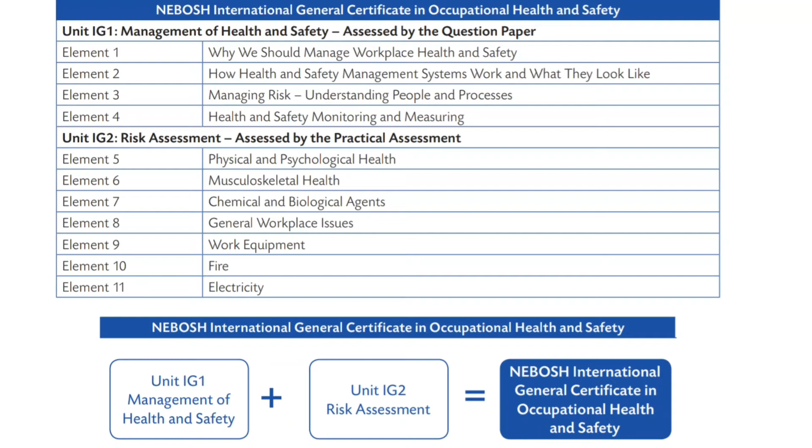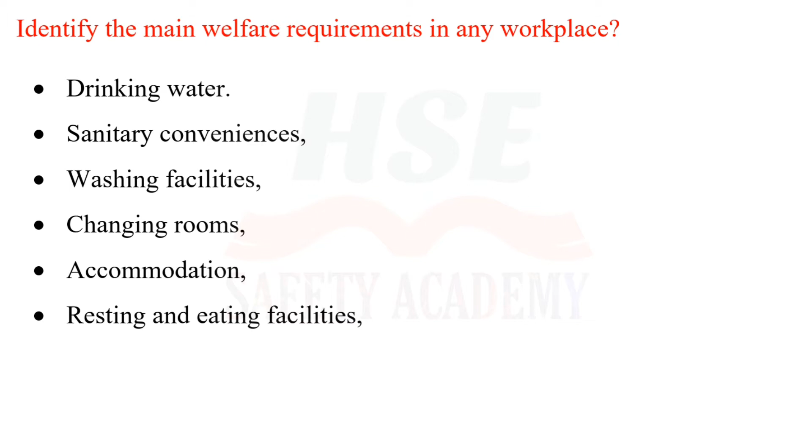NEBOSH International General Certificate in Occupational Health and Safety Unit IG2 Element 8, General Workplace Issues. Identify the main welfare requirements in any workplace. Drinking water. Sanitary conveniences. Washing facilities. Changing rooms. Accommodation. Resting and eating facilities.

Identify the protective measures to be used for working in conditions of extreme heat. Providing good workplace ventilation such as air conditioning or fans to circulate air which has a cooling effect. Insulating heat sources by lagging hot pipes. Shielding heat sources to control radiant heat and prevent contact burns. Providing cool refuges where workers can escape the heat.

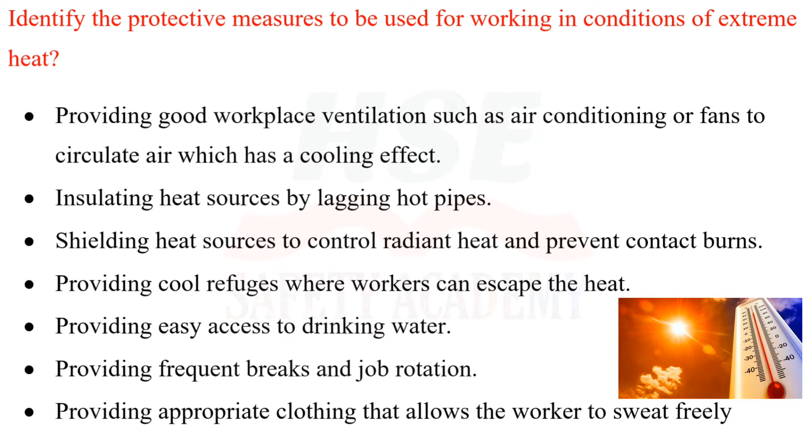Providing easy access to drinking water. Providing frequent breaks and job rotation. Providing appropriate clothing that allows the worker to sweat freely. What are the health and safety effects of working in a hot environment? Dehydration. Muscle cramps. Heat stress.

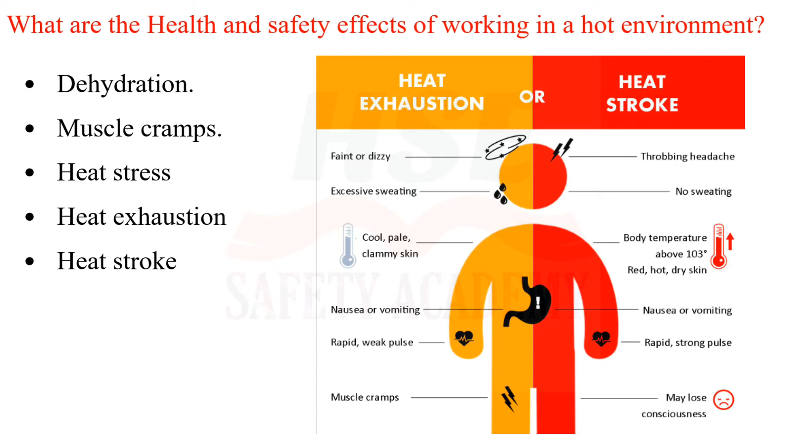Heat exhaustion. Heat stroke. What are the main risks using ladders? Workers falling from a height. Falling off the ladder. Ladder toppling sideways. Ladder base slipping out from the wall. Objects falling from height. Contact with live overheads.

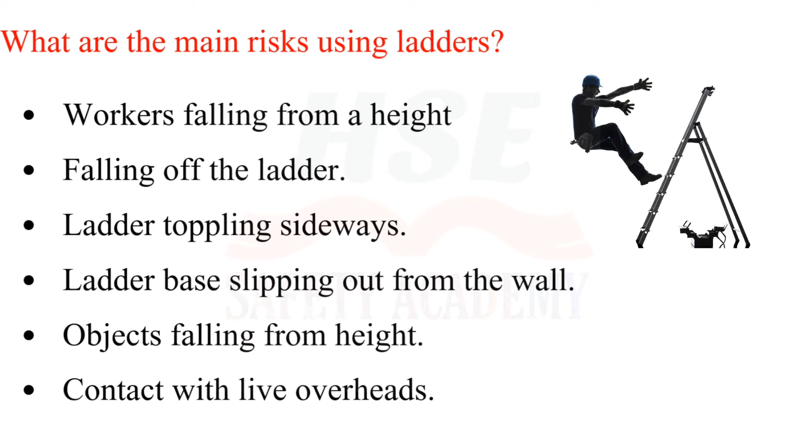Explain the safety precautions for using ladders. Not siting or handling near live overheads. Siting on a solid, flat base so that the feet do not sink into the ground. Weight should only be supported on the stiles, never on the rungs. Angling the ladder ideally at 75 degrees to the horizontal or at a ratio of 1:4, 1 out to 4 up, distance away from the wall to height.

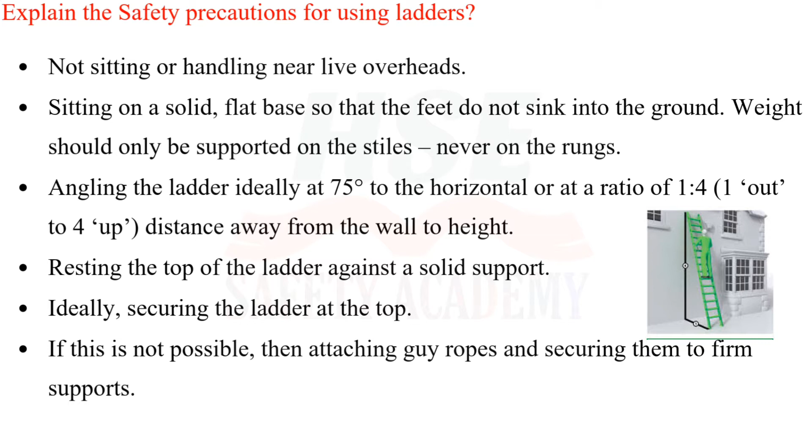Resting the top of the ladder against a solid support. Ideally, securing the ladder at the top. If this is not possible, then attaching guy ropes and securing them to firm supports. If this is not possible, ensuring that the ladder is footed by someone standing on the bottom rung.

Extending the top of the ladder far enough above the level of the working position or the platform onto which it provides access to provide a safe handhold. This should be at least 1 meter or 5 rungs if used as a means of access. The stepping off point should be safe and clear. Making sure that only one person climbs on the ladder at any one time.

Not carrying anything in the hands while climbing, so that both hands are free to grasp the stiles. Maintaining 3 points of contact while working. Not painting wooden ladders as this can hide defects such as rot.

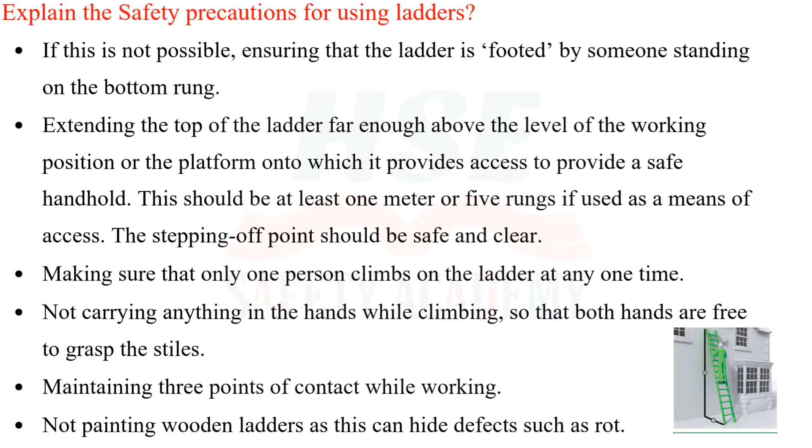What are the safety precautions for the use of stepladders? Carry out a daily check of the stepladder before use. Always ensure that the ladder is fully open. Make sure that the locking devices are in place. Only use on firm, level ground which is not slippery.

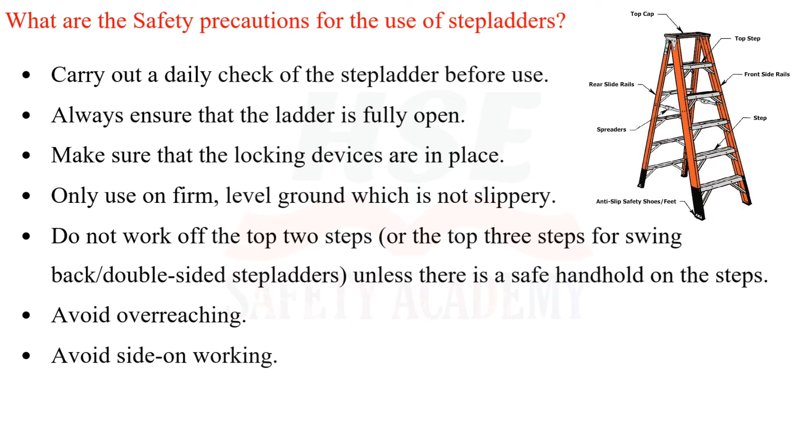Do not work off the top 2 steps, or the top 3 steps for swing back, double-sided stepladders, unless there is a safe handhold on the steps. Avoid overreaching. Avoid side-on working.

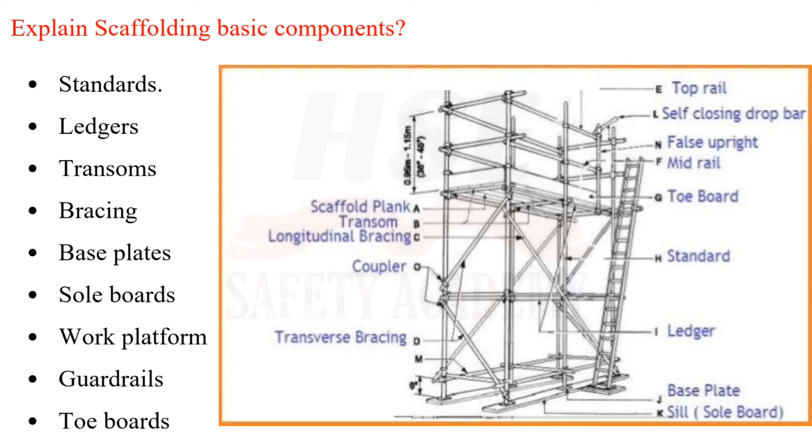Explain scaffolding basic components. Standards. Ledgers. Transoms. Bracing. Base plates. Sole boards. Work platform. Guardrails. Toe boards. Explain factors that might cause the collapse of an independent tied scaffold.

Work platform overloaded. Scaffold built on soft ground without use of adequate sole boards. Scaffold not tied adequately to the building. Insufficient bracing incorporated into the scaffold. Standards not upright. Standards bent, buckled or heavily corroded. High winds. Incorrect couplers used to join tubes together.

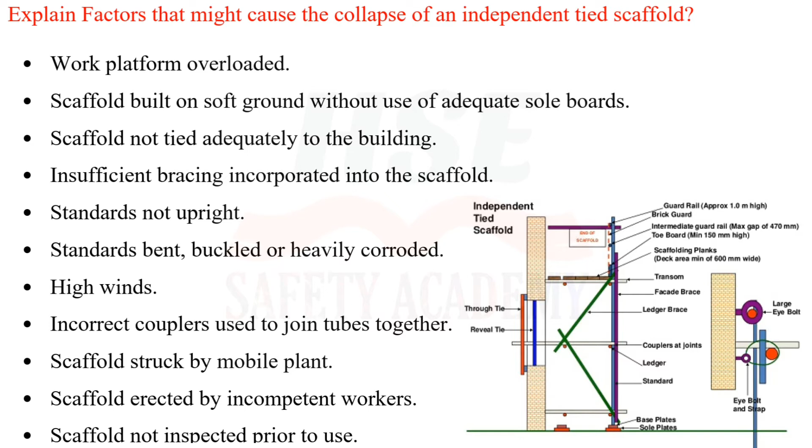Scaffold struck by mobile plant. Scaffold erected by incompetent workers. Scaffold not inspected prior to use. Explain safety precautions for safe use of mobile tower scaffolds. The guardrail must be fitted to the work platform.

The tower must not be overloaded. The wheels should be locked when the tower is in use. The tower must be sited on firm, level ground. People and materials should not remain on the tower when it is moved.

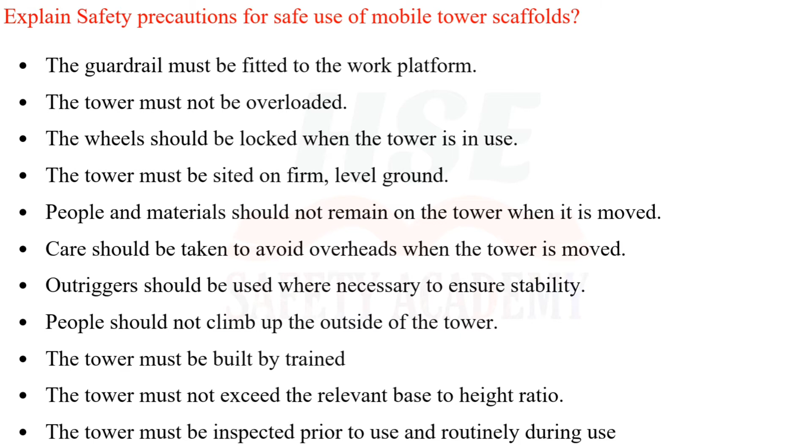Care should be taken to avoid overheads when the tower is moved. Outriggers should be used where necessary to ensure stability. People should not climb up the outside of the tower. The tower must be built by trained people. The tower must not exceed the relevant base to height ratio. The tower must be inspected prior to use and routinely during use.

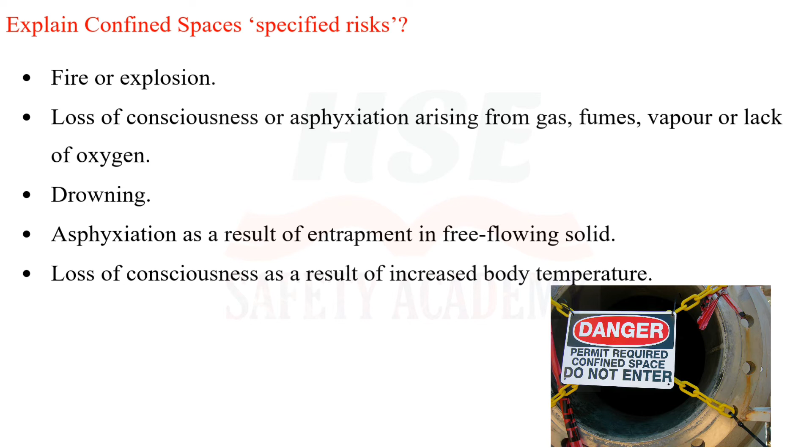Explain confined spaces specified risks. Fire or explosion. Loss of consciousness or asphyxiation arising from gas, fumes, vapor or lack of oxygen. Drowning. Asphyxiation as a result of entrapment in free-flowing solid. Loss of consciousness as a result of increased body temperature.

Identify the various issues that must be addressed in a safe system of work for entry into a confined space. Level of supervision. Competency requirements of the people doing the work. Communication methods to be used inside the confined space. Atmospheric testing and monitoring before and during entry. Ventilation that may be required before and during entry.

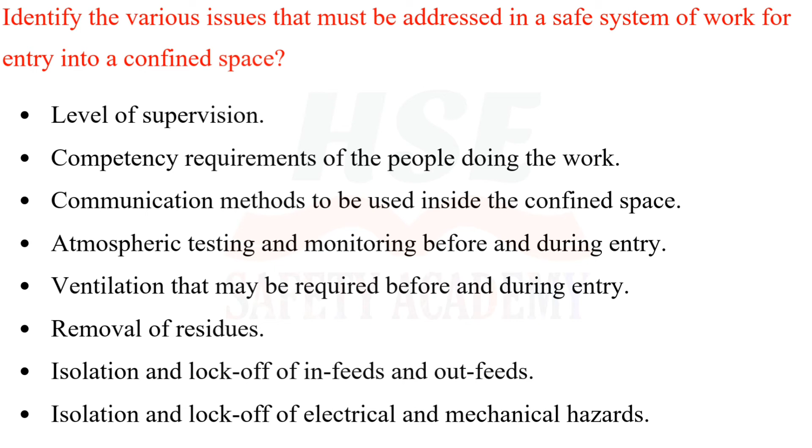Removal of residues. Isolation and lock-off of in-feeds and out-feeds. Isolation and lock-off of electrical and mechanical hazards. PPE requirements for workers inside the confined space, which may include respiratory protective equipment. Safe and quick access and egress methods.

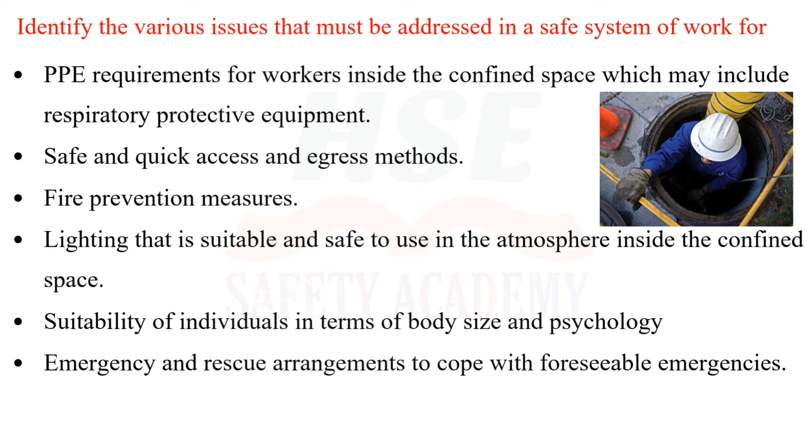Fire prevention measures. Lighting that is suitable and safe to use in the atmosphere inside the confined space. Suitability of individuals in terms of body size and psychology. Emergency and rescue arrangements to cope with foreseeable emergencies.

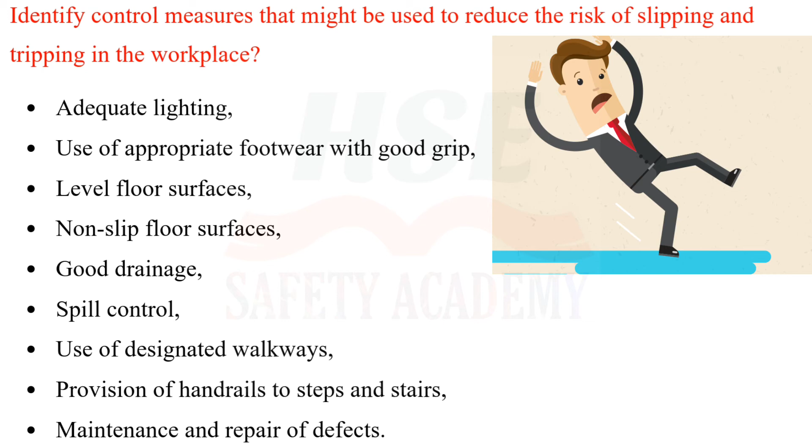Identify control measures that might be used to reduce the risk of slipping and tripping in the workplace. Adequate lighting. Use of appropriate footwear with good grip. Level floor surfaces. Non-slip floor surfaces. Good drainage. Spill control. Use of designated walkways. Provision of handrails to steps and stairs. Maintenance and repair of defects.

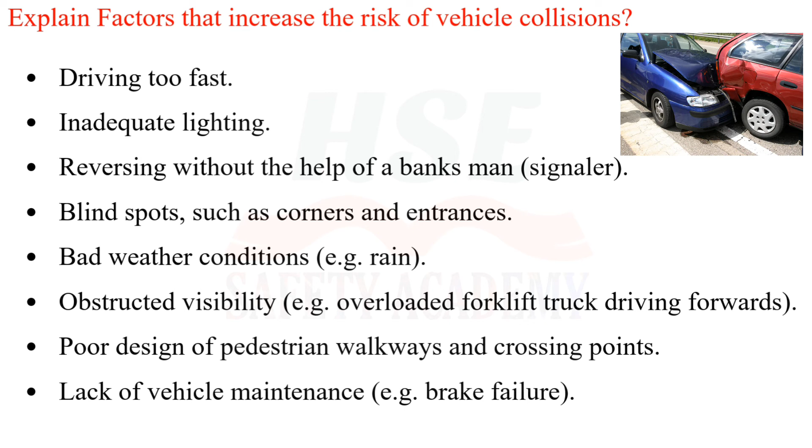Explain factors that increase the risk of vehicle collisions. Driving too fast. Inadequate lighting. Reversing without the help of a banksman, signaler. Blind spots, such as corners and entrances. Bad weather conditions, for example rain. Obstructed visibility, for example overloaded forklift truck driving forwards. Poor design of pedestrian walkways and crossing points. Lack of vehicle maintenance, for example brake failure.

Identify the unsafe practices that might cause a forklift truck to overturn. Cornering while being driven too fast. Uneven loading of the forks. Driving over potholes. Driving with the load elevated, especially cornering. Uneven tire pressures. Driving across a slope, rather than straight up or down the fall line. Excessive braking. Collisions, especially with curbs.

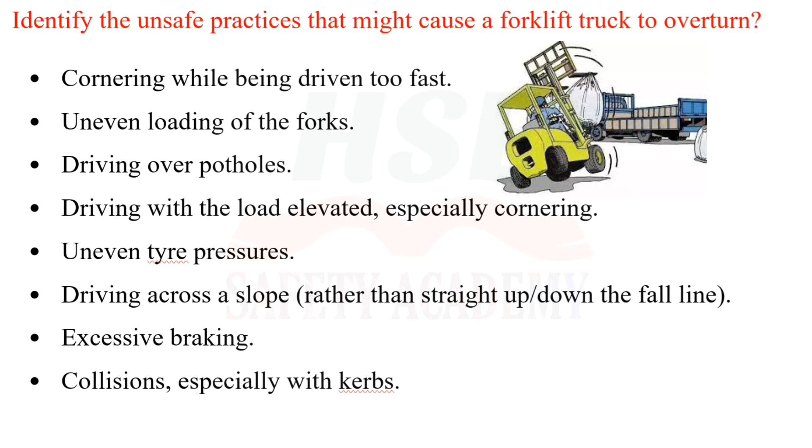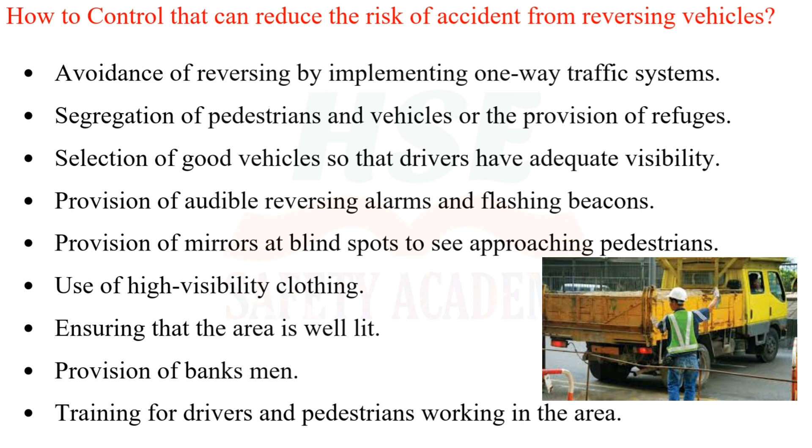How to control that can reduce the risk of accident from reversing vehicles. Avoidance of reversing by implementing one-way traffic systems. Segregation of pedestrians and vehicles or the provision of refuges. Selection of good vehicles so that drivers have adequate visibility. Provision of audible reversing alarms and flashing beacons. Provision of mirrors at blind spots to see approaching pedestrians. Use of high visibility clothing. Ensuring that the area is well lit. Provision of banksmen. Training for drivers and pedestrians working in the area.

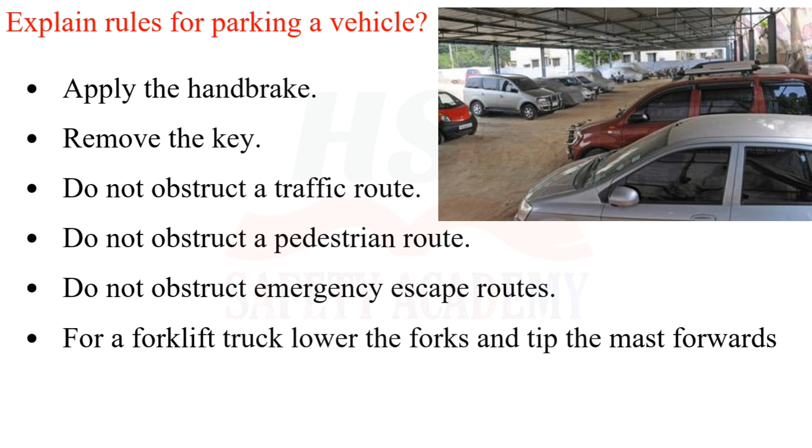Explain rules for parking a vehicle. Apply the handbrake. Remove the key. Do not obstruct a traffic route. Do not obstruct a pedestrian route. Do not obstruct emergency escape routes. For a forklift truck, lower the forks and tip the mast forwards.

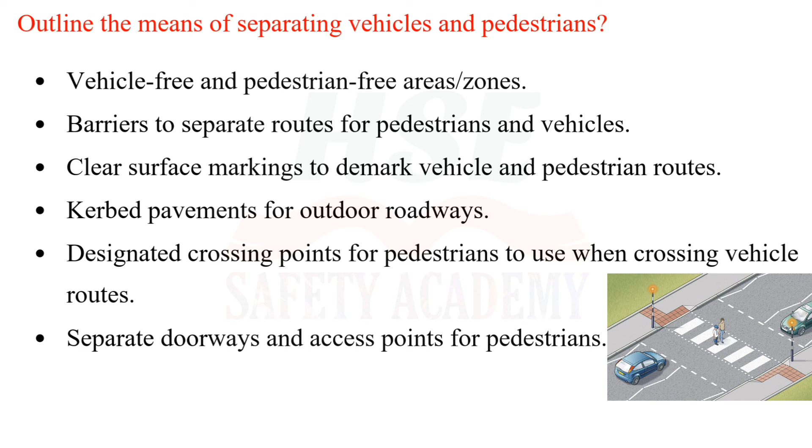Outline the means of separating vehicles and pedestrians. Vehicle-free and pedestrian-free areas, zones. Barriers to separate routes for pedestrians and vehicles. Clear surface markings to demark vehicle and pedestrian routes. Curbed pavements for outdoor roadways. Designated crossing points for pedestrians to use when crossing vehicle routes. Separate doorways and access points for pedestrians.